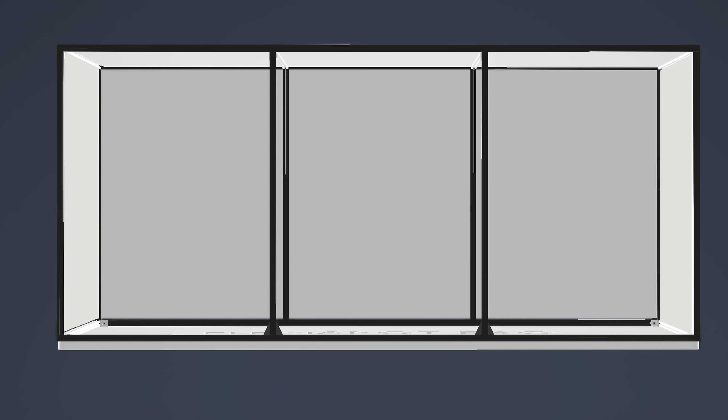In this video, I'm actually going to be doing a DIY project that I've been planning for quite a while, and that is an enclosure for my 3D printers.

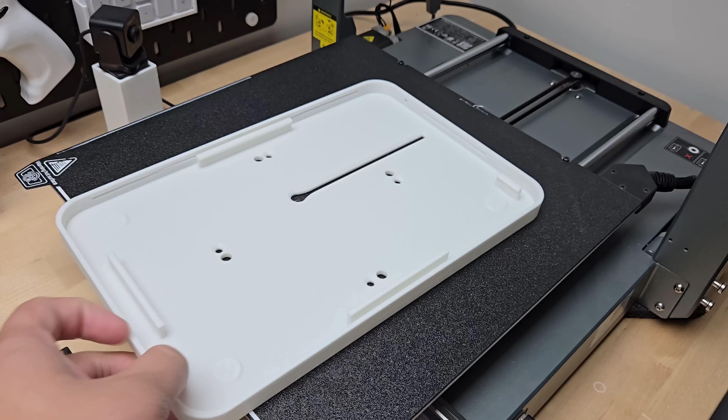You guys have probably seen that I've been doing 3D printing videos a little bit more often recently, and a lot of my LED projects have involved some sort of 3D printing, so I've started to accumulate 3D printers. I've also started selling prints on Etsy, and because of that, I've kind of run out of room for my 3D printers either in my office or on my workbench.

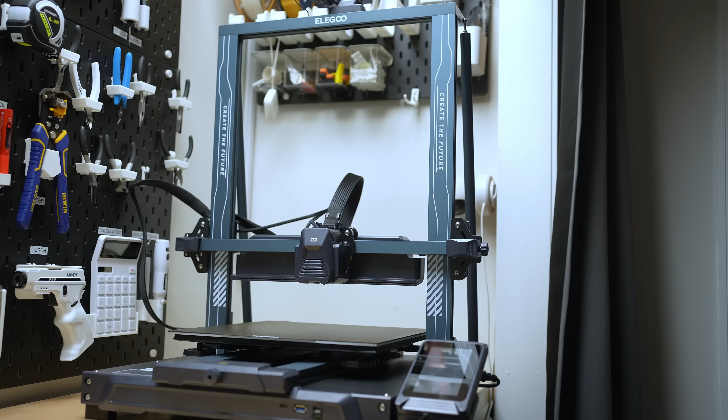So I decided it was time to expand out to the garage. However, since it does get a little chilly in the garage in the winter, I wanted to have an enclosure for my 3D printers so that I can keep as much of the heat in as possible, making more consistent prints. Recently, I've been using these enclosures from UPI, and while I really like them, I wanted to make a huge one that could fit 3 of the largest size 3D printer I have, all in one enclosure.

To start with, I needed a really good workbench, and I was looking for one that I could raise and lower as necessary, and I'll show why this matters later on. I reached out to FlexiSpot to see if they had anything that would fit my needs, and they had the perfect workbench. This would be my solid foundation, so while I waited for that to arrive at my house, I had to move on to the frame.

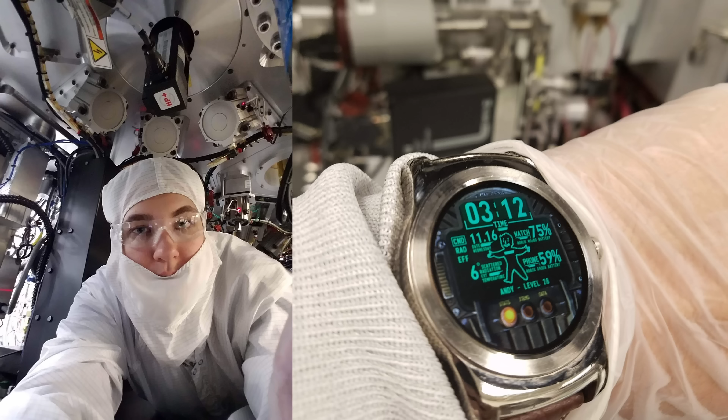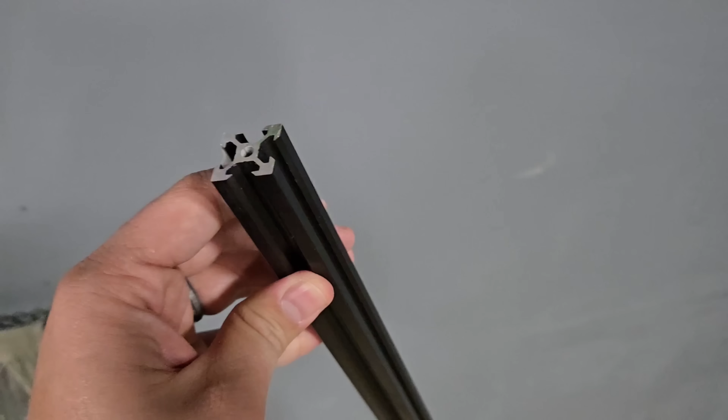In a previous day job I worked in a clean room, and we had a ton of machines that had hoods or enclosures made from polycarbonate or acrylic and aluminum extrusions. I was really fascinated with these aluminum extrusions, which are sometimes called T-slot profiles or struts. What makes them so special is this slot that runs along each length.

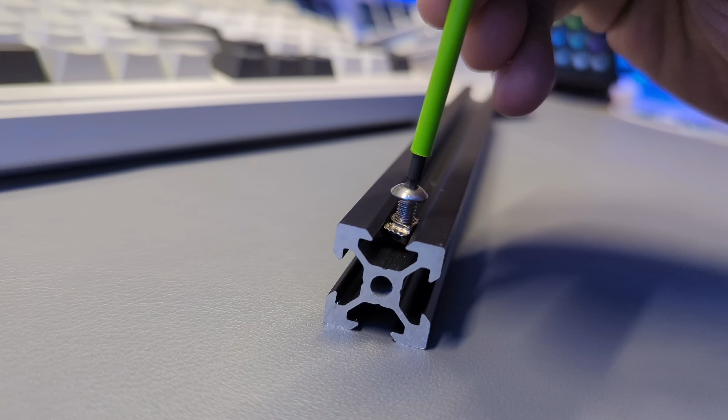They make something called a T-slot nut that slides into this slot quite easily, and when a screw is screwed into it, it rotates and the wings swing out and under the edges of the channel, and this locks the nut in place. This effectively means that without drilling any holes in this aluminum profile, you can attach things to it anywhere along its length.

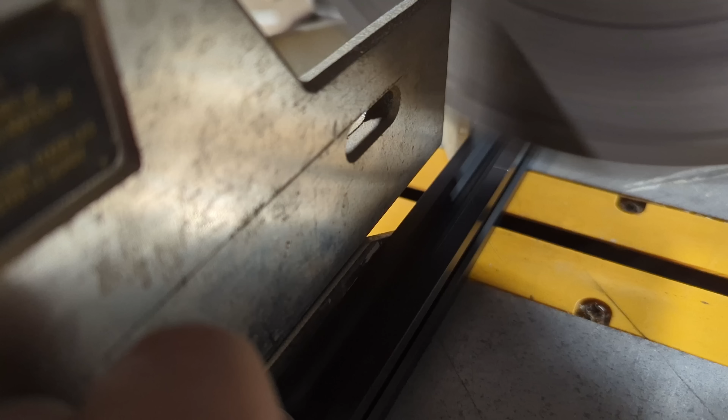They're also super strong, and if you want to cut them, you can actually just cut them with a miter saw. So if you have a miter saw, you're good to go. These aluminum profiles also have a ton of different accessories that you can get with them, so I got a bunch of these.

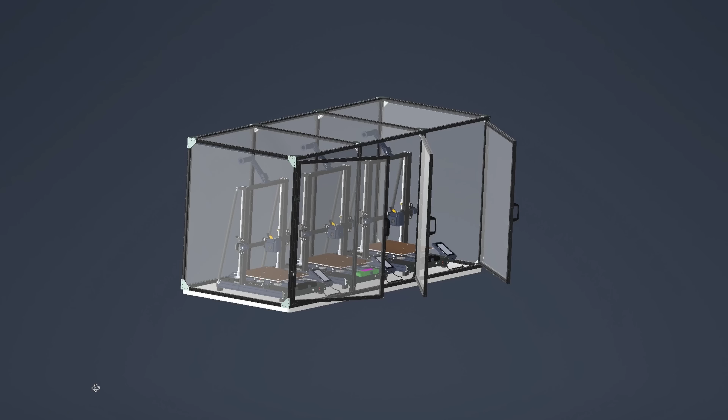So I had a plan for the base of my enclosure and what I was going to make the frame out of, but I needed to figure out what I wanted to do for the sides and top. I originally wanted this entire enclosure to be made of acrylic so you could see in on all sides, but then I went to the hardware store and looked at the price of acrylic, and it was super expensive.

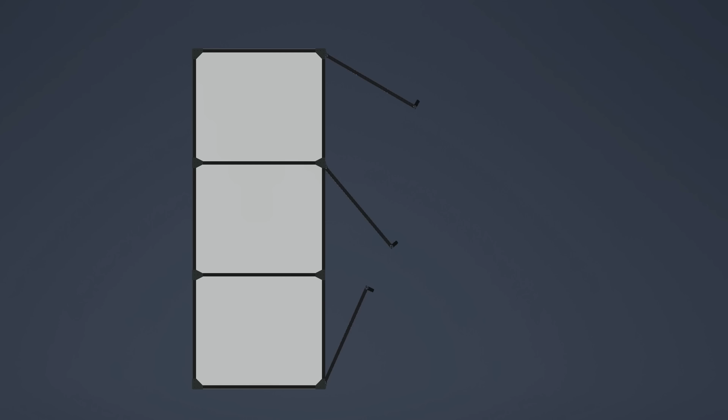I decided to make the back, sides, and top out of corrugated plastic sheets, which I got from Home Depot. This has moderate stiffness, but I'm not looking for something structural, just something that could be a barrier from the garage temperatures. For the front, I still wanted to use acrylic, and since I planned to have 3 printers in this enclosure, I figured 3 separate pieces could be used for the doors on the front.

To prepare the space in the garage, I actually had to remove my RepRack 3D printer filament storage area. Then I painted the wall a dark gray color, and once done, I installed the filament storage again, but a little higher up. I don't think it's actually gonna stay here permanently because reaching over this enclosure to access that is gonna be a pain, so I'll probably end up moving the storage somewhere else.

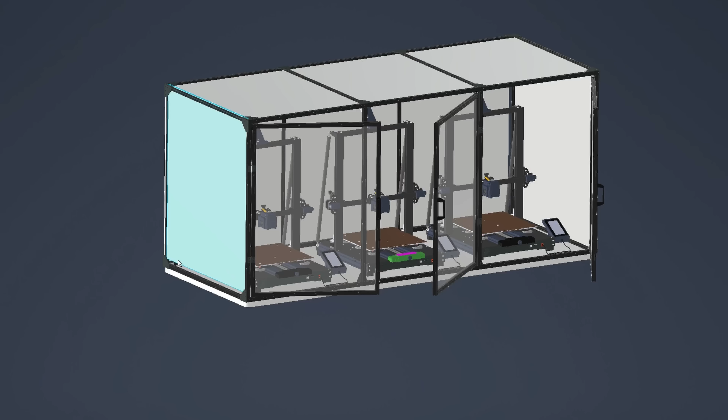I also picked up a big doormat to lay down right at the base of the wall as a good flooring since my concrete floor is not super pretty. I drew a 3D model of the entire assembly of this thing so I would have an idea of how it would all go together, and I could use that to get accurate dimensions for the different parts I need to cut. With a plan mostly formed in my mind, I started to put it together.

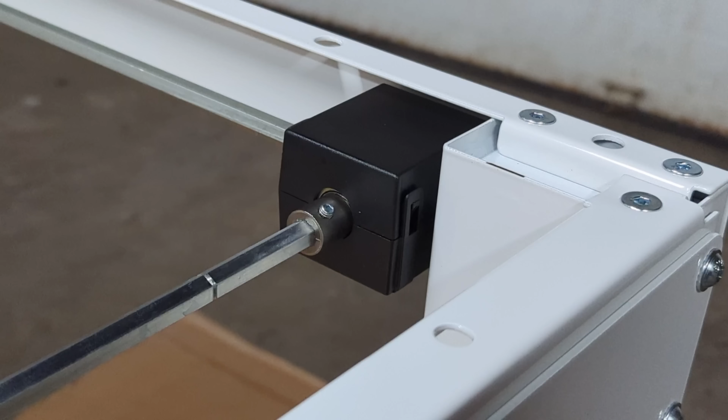I first assembled the FlexiSpot workbench, which was super easy, just building the frame, putting together the workbench top, and then connecting the two together, and then plugging in power so I could test the motor out. When I was done, I was surprised at how big this workbench is.

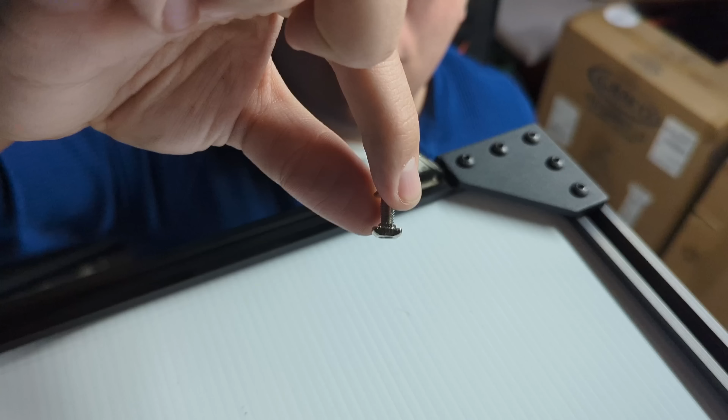The reason why I chose to use a motorized workbench as the base for this enclosure is because it's a feature that I wanted to add for my 3D printers. My plan is to build the entire enclosure on this workbench, then put some eyelets connected to the aluminum extrusion frame and connect those via some sort of chain to the ceiling, so that when I lower the workbench via the motorized legs, it'll expose the printers somewhat so I can access the back and even slide them out if necessary.

We all know with 3D printer enclosures that they really prohibit you from doing proper work on your 3D printer, so the ability to effectively lift the enclosure off of the workbench, exposing the 3D printers, is huge.

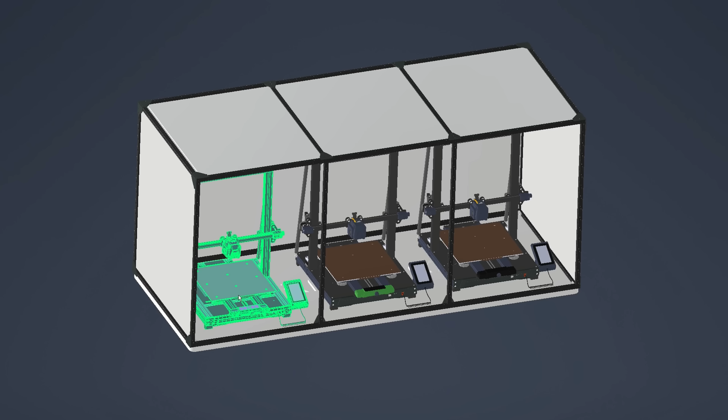And without further ado, let's get back to the build.

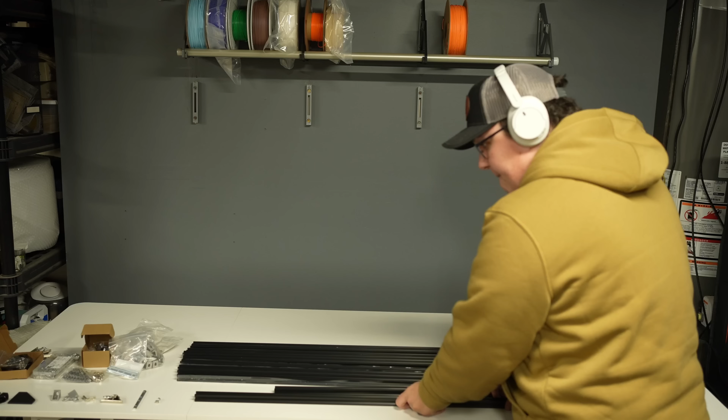With the workbench all put together, I put the whole thing on the doormat I had purchased and laid out my materials. The aluminum profile came in 1000mm lengths, and since the workbench top is exactly 2000mm in length, the long pieces of the enclosure will be made by connecting two of these together.

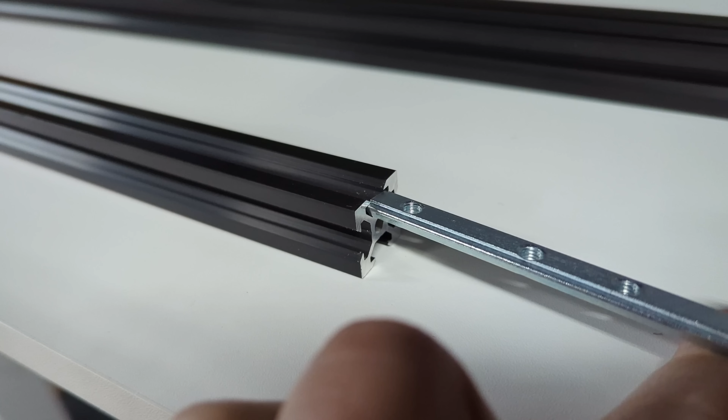For this, I use these connecting bars, which slide right into the T-slot channel and then are held in place by set screws. I put one of these on the two sides of the channels and slotted the two profiles together, providing a nice solid connection.

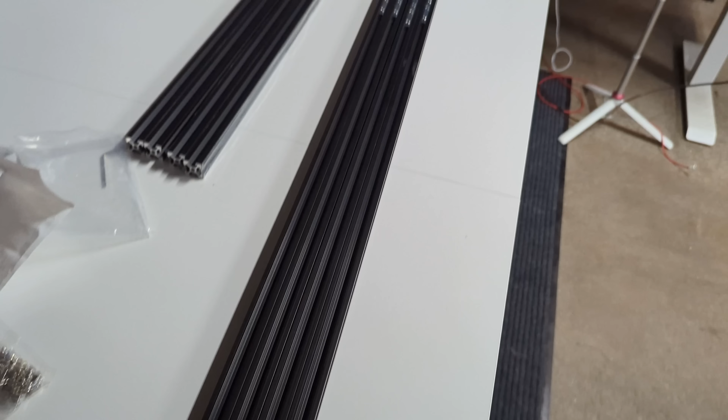After making the long lengths, I had to make the short lengths for the top and bottom. This was my first try at cutting these things. It's a lot easier than you think though.

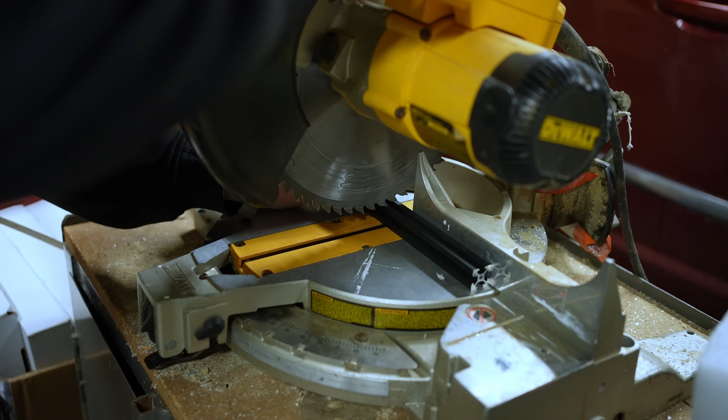Just measuring them and then marking your measurement with a utility blade, doing a light cut on the surface. Then I brought them over to the miter saw and cut them right on the line, producing a decently clean cut.

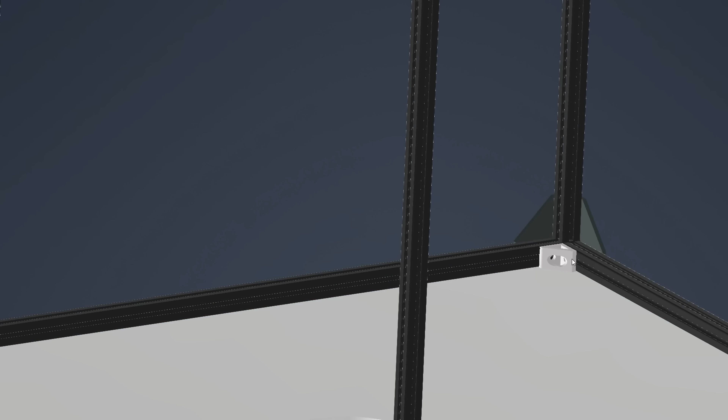For the corners, I used corner brackets with T-slot nuts and screws and secured each of the corners to form the whole piece. I'm fine with using these brackets even though they block the T-slot on the inside because I'm not putting any material into that slot.

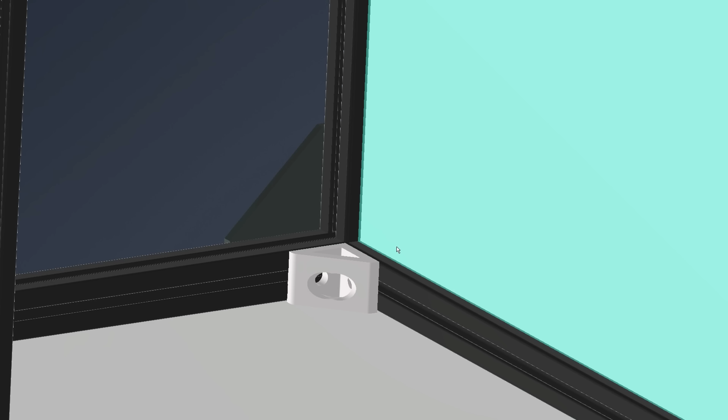This is just the base. However, I had to be careful on the other parts of the frame because I'll be using those slots as a way to capture the plastic corrugated sheets as panels.

For the corner post, I used a hidden corner bracket to secure it to the front face, which uses set screws to hold it in place.

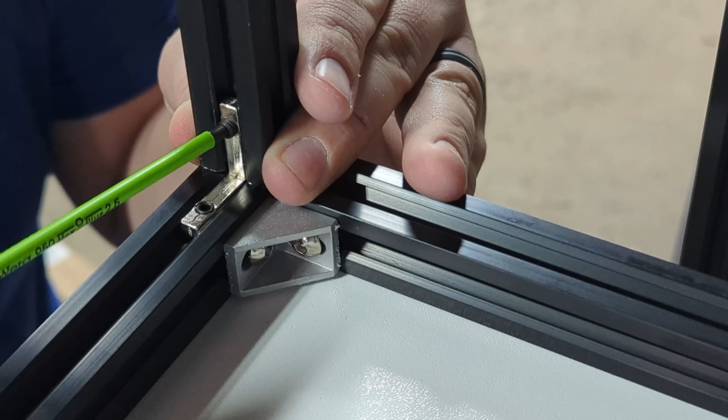Then I attached one of those black triangular gusset plates on the side to give it more structural stability, using the T-slot nuts and screws to secure it in place.

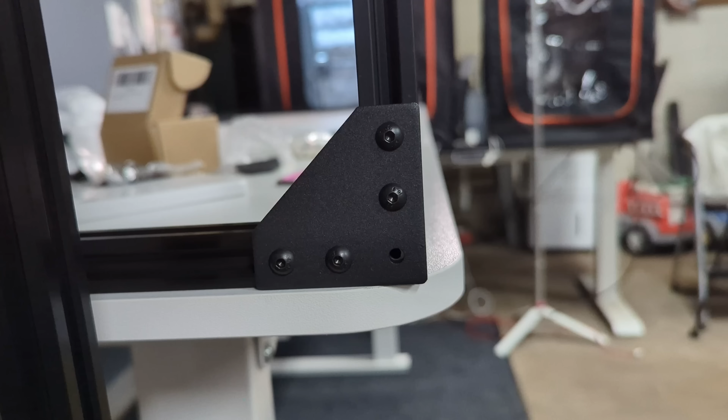At first, I left the corner screw out since there wasn't any slot there, so I couldn't have a T-slot nut behind it. But then I realized that with a little bit of pressure, I could screw it right into the center hole of the aluminum profile, effectively self-tapping that hole.

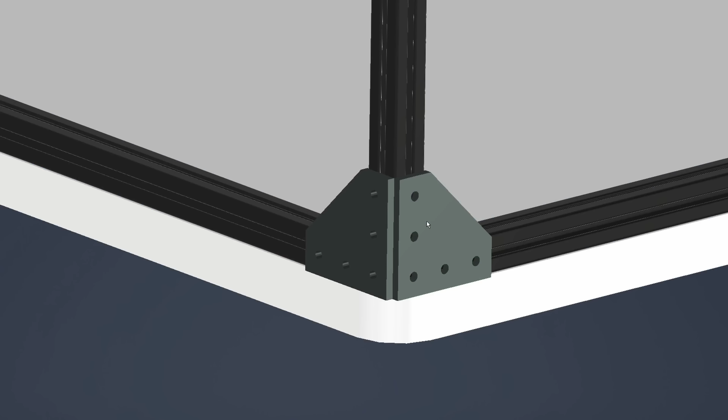For the back corner posts, I didn't use the hidden corner brackets since they would get in the way of the material I wanted to slide into those slots. So I skipped those and instead used two triangular corner gusset plates to hold the whole corner together.

With the four corner posts done, I now had to install the front and back posts. The front post I decided to place to provide space for the doors I'll be installing later on, but I decided to put back posts at the same point because it was a good spacing for structural members on the back.

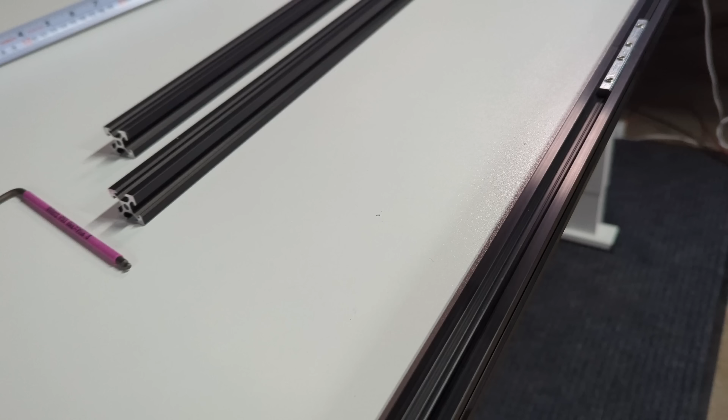For the front ones, I had already inserted a hidden corner bracket into the T-slot channel, so I just had to measure for the appropriate opening width for each of the doors and then secure the hidden bracket with the set screws.

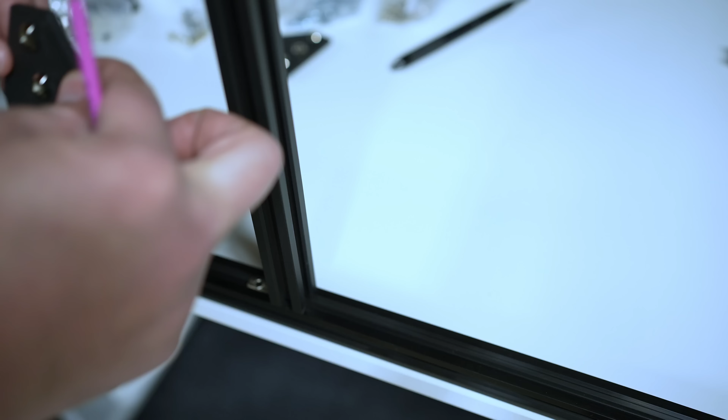Then I installed these T-gusset plates on the inside of the door, and these provide really good structural stability, securing the posts to the bottom of the frame, but they also act as door stops, so the doors won't be able to swing too far in.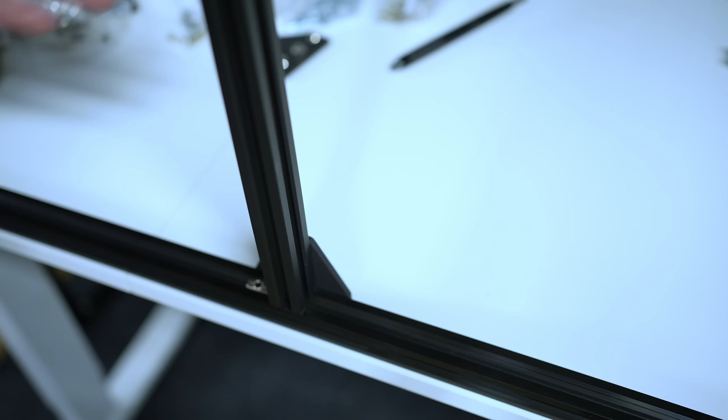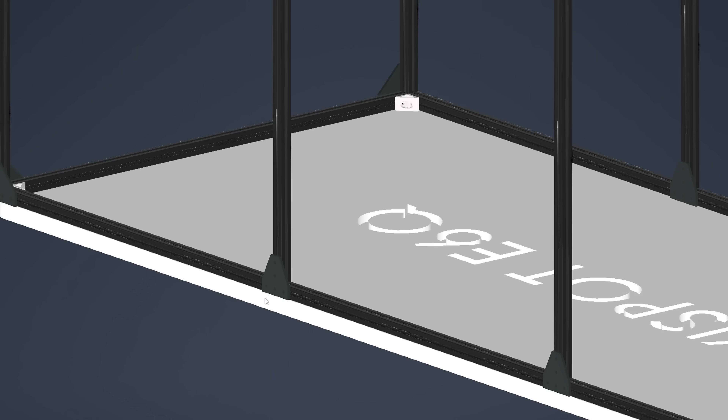For the back posts, I once again couldn't use that hidden corner bracket because I need those slots for the material to slide into. So for each of the posts, I used the T-shaped gusset plates to secure those firmly to the base of the frame.

Once again, measuring that opening to make sure the post was the same distance away from the edge as the front post was. At this point, I needed to install the material for the back and sides of the enclosure, and I used corrugated plastic sheeting as I mentioned.

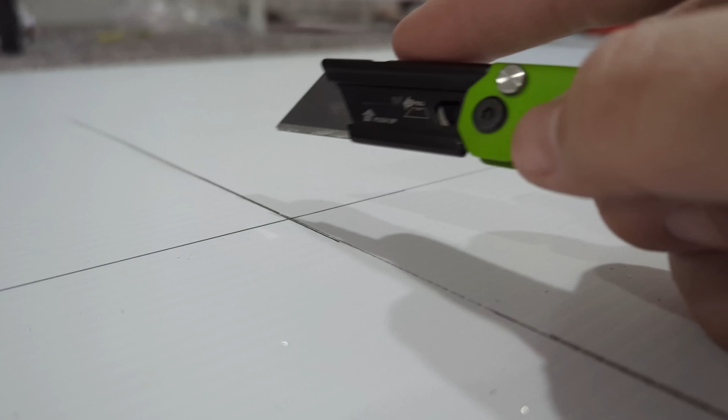So what I did was measure the size I needed, adding a little extra to provide for the channel they were going to slide into, then laid it out on my basement floor, used a T-square to draw out the shape of the panel, and cut them using a utility knife. Then I slid each one into the slots, and they slid in really nicely.

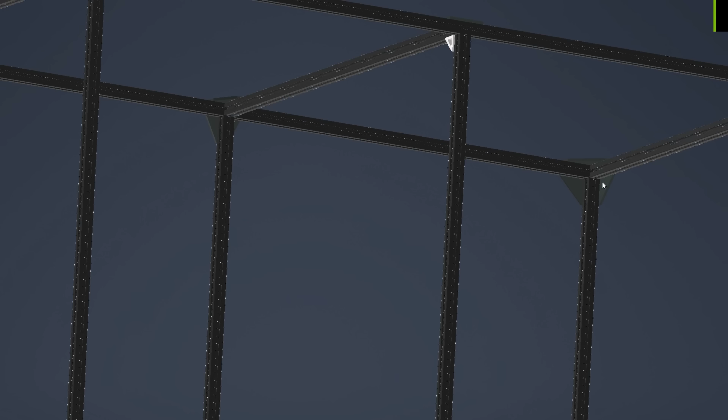After that, I could install the top part, which I built pretty much the same way as the base of the frame, except for a couple things. First, I didn't use inside corner brackets for the corners of the top, because I need those slots for putting material in for the top of the enclosure.

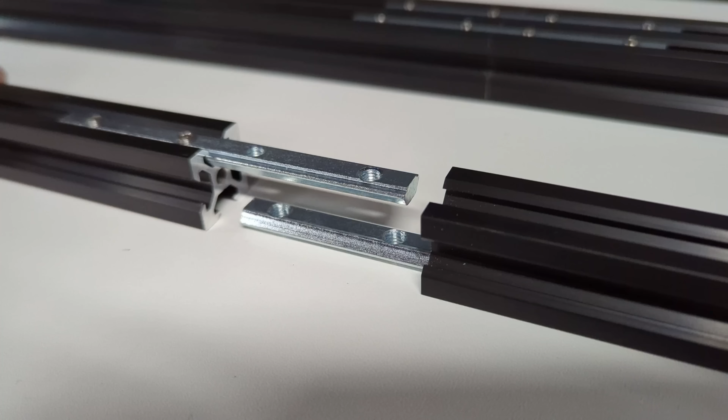Second, those connecting bars for the long piece of this part of the frame, I couldn't leave in the slot on either the side or the bottom, because both of those channels would need material in them, so I had to put them on the top and on the back side.

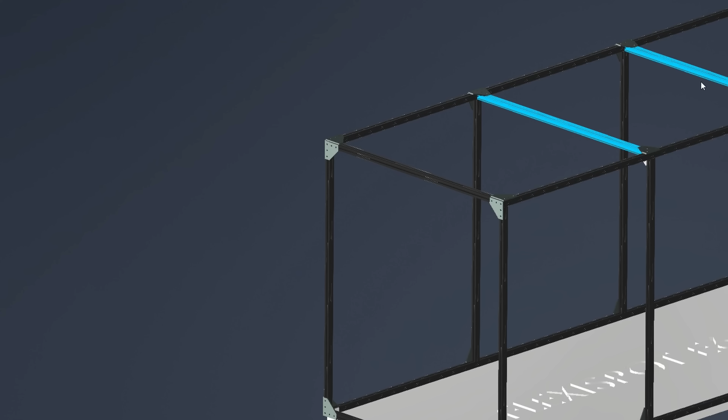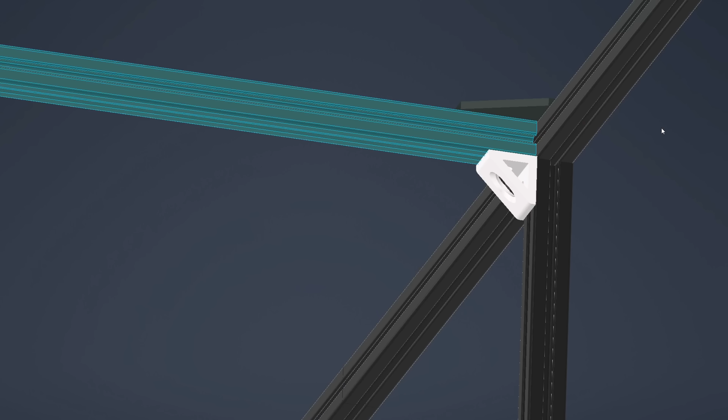I also added some more short crossbars along the top using T-gusset plates, and to secure the top, I used corner gusset plates for each corner and T-gusset plates on the back and top sides. But to secure the front post to the top, I had to use inside corner brackets to secure each vertical post to the top crossbars.

This is because I didn't want to block the doorways in any way. I had also cut the corrugated plastic for these top panels, so all I had to do was pop those in before I secured the crossbars.

So at this point, I have the frame fully built and I have barrier material, or those plastic panels, on 3 sides of the enclosure. I really wanted to install the doors in this video as well, but that material isn't here by the time it's time to finish this video, so that's gonna have to wait until part 2.

But in the meantime, I want to show you how I'll use this FlexiSpot workbench. When I was building the top part of the frame, I slipped 2 eyelets into each T-slot on the 2 sides of the frame, then held them in place with T-slot nuts and screws because they tend to slide around. Then I extend the FlexiSpot desk all the way up as high as it goes, hook a chain to the eyelet and then to a nail in the rafters of my garage ceiling.

And then when I lower the FlexiSpot down as low as it'll go, you can see that the enclosure is easily lifted up off the workbench, and that'll give me plenty of room to access my 3D printers.

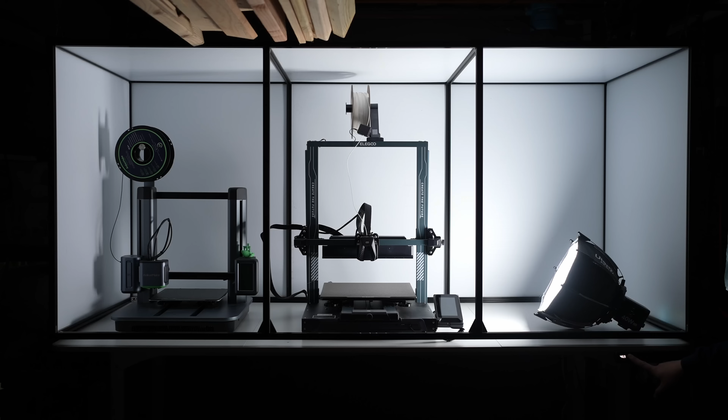Now I'm thinking of creating some posts in the workbench somehow, kind of as guides or pilots, so that this 3D printer enclosure sets down the exact same way it came off every time.

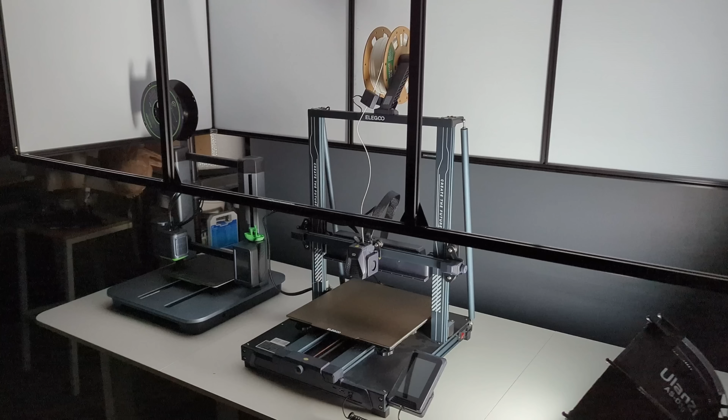I can effectively lift the 3D printer enclosure a full 20 inches off of the workbench, and while it doesn't clear the top of the printer, it's still quite a ways and enough to do any kind of maintenance I want on the printer. And if I want, I can easily lift the enclosure the rest of the way off.

I'm telling you guys, you're gonna want to see part 2 because I have a ton of plans for this 3D printer enclosure. I want to install the doors in part 2 like I mentioned before, but I also want to add a temperature and humidity sensor with display. I want to add lighting. I want to add a carbon filter, cameras of course, and most importantly, I want to make the whole thing smart and connect it to Home Assistant because you know that's what we do in this community.